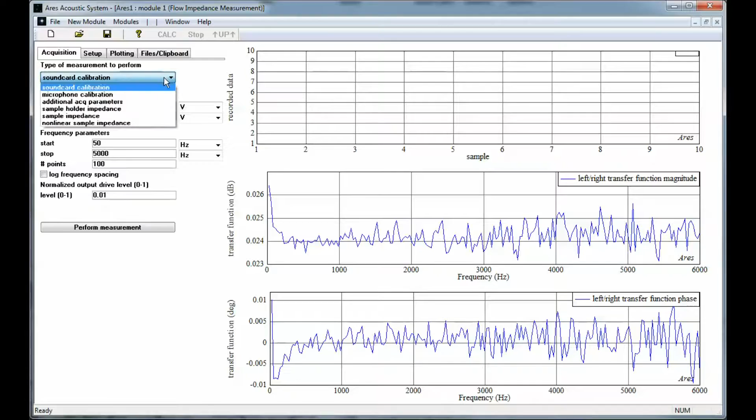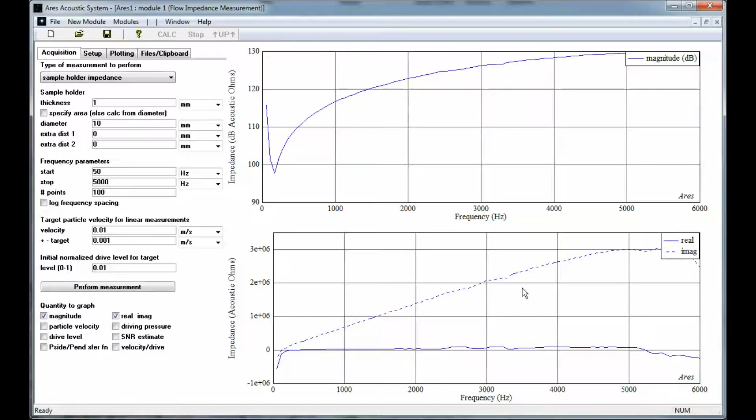Some additional parameters. Here's the sample holder impedance that was measured. This is what's going to get subtracted from the actual measurement. And then the actual measurement is done under sample impedance. I've already got the sample diameter set to 10 millimeters. The sample thickness is only important if you want to normalize by thickness. We're not going to do that, so I'm just going to leave it as 1, an arbitrary number.

This parameter allows you to set the particle velocity through the material that's tried to be achieved during the measurement. By keeping this relatively low, substantially under about 1 meter per second, you ensure that you're measuring linear parameters and not getting any nonlinearities involved in the measurement. And we're going to go ahead and subtract the original sample holder. So I'm just going to leave this as the default name of dataset 1 and start the measurement.

It asks you to configure the system with the following stack up. We've already done this. So I'm going to hit OK, and this is going to take a few minutes to run, so I'll probably just skip through this in the video that gets posted.

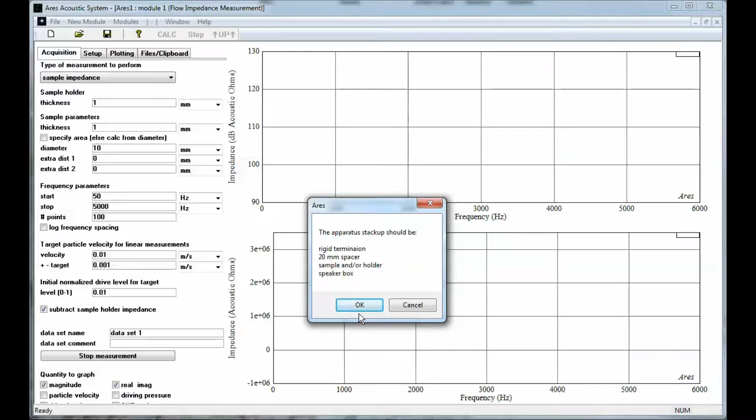Okay, so it's done the low frequency measurements with the large stack up. Now it's asking us to switch it to just the 20 millimeter spacer. So I'm going to go ahead and change the stack up to just use the 20 millimeter spacer. We'll do the high frequencies. I'll go ahead and hit OK.

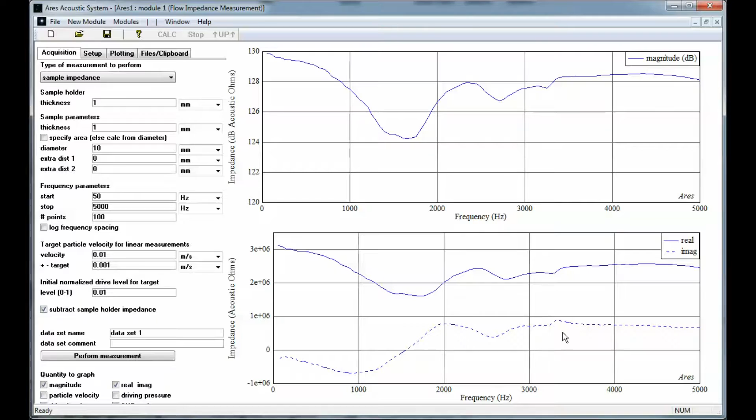Okay, so the measurement is done. I'll hit OK here. So looking at the impedance, we see that there's some frequency dependence to the impedance. We'll discuss what this means in a little bit here.

So I'm going to go to the plotting section. I'm going to plot that data set that we just took. And I'm going to also go ahead and plot the sample holder impedance. I'm going to increase the line thicknesses here so we can see it a little better. So the impedance that we measured is in blue. The green impedance is the impedance of the sample holder itself.

So the sample holder has very little real part to it. The imaginary part is dashed. The sample holder impedance has quite a bit of mass reactance to it. This is roughly j omega going up. Had we included this impedance with the actual measurement, this imaginary impedance would be way up here, and it would mostly be consisting of the mass reactance of the sample holder and not representative of the material itself. So it is important to subtract the sample holder impedance in most cases.

So here's just the sample impedance. A few things to point out here is that it's non-uniform over frequency. If the material was held stationary, completely still, it is a porous material, so air can flow through it, and you'd experience the resistance of the air flowing through the material. If the material was purely stationary, we'd see that the real part was largely a constant value, independent of frequency, and the imaginary part would have a very little bit of mass reactance of the air inside the pores of the material.

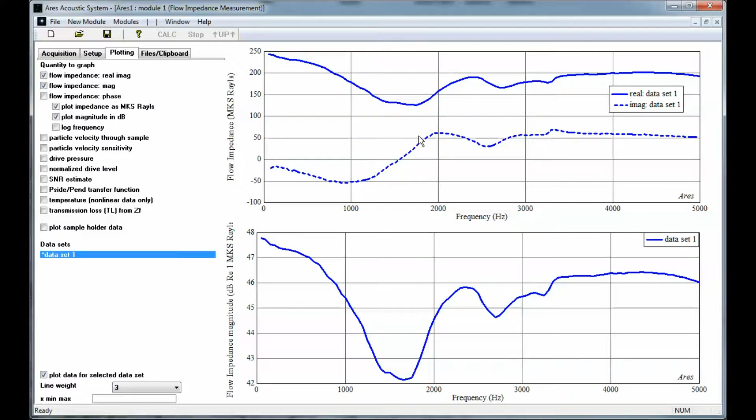So that's how this material is behaving. If you use this material in an acoustic application, it's worth understanding how its impedance behaves so that you can understand your design better. Now, one way to use this is to import this impedance directly into an Ares model. So I'm going to go to Files/Clipboard.

There's only one data set here. I'm going to select Save the Sample Impedance. Hit Save. I'm going to overwrite my existing data set that I made. And now I'm going to open up an Ares model that I have previously built that shows a speaker radiating into free space, and we're measuring the pressure at about a foot away.

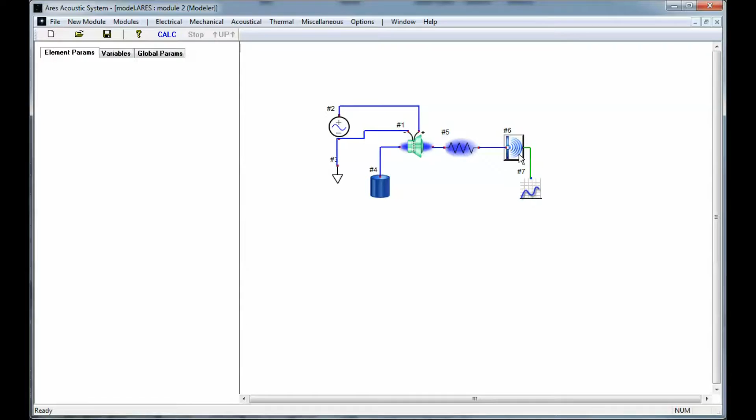Here in the model, I've got this resistance element put in here. We're going to use that momentarily, but for now I have the resistance set to 0, so this isn't doing anything to us. And the graph response is just showing a classic baffled speaker response.

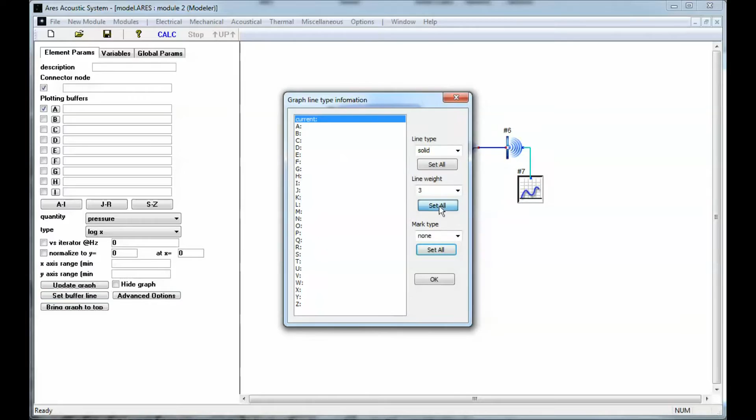Now I'm going to copy this into buffer A of this graph element and plot it. I think I need to set the line weight to be a little thicker. So now I've got buffer A equal to the current buffer, so they're just lying right on top of each other. If I come in here and I use this feature to load the impedance of this impedance file that we exported, this option becomes available to use the file impedance data.

I'm going to check that. I'm going to recalculate, and so now we're seeing the effects. The blue curve is the effect of having the material in place. Its main effect is to drop the response at resonance, so we're adding some damping, bringing that down.

We don't see a lot of effect due to the complex frequency response of the material, but you can see we're getting a little bit of an effect in here. So all of those impedance variations of the material are causing just a few dB ripple in the response. Probably not important for most applications. But the main thing it's adding is this resistance that's dropping the response at resonance.

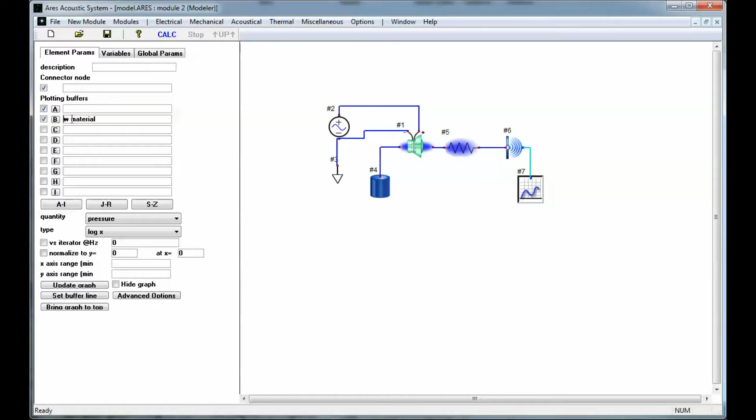So I'm going to go ahead and copy this into buffer B. I'll plot it and I'll call this with material. And now I just want to see, for the heck of it, what would happen if I didn't use the impedance of the material, but I just used a simple resistor. How well does a simple resistor model the behavior of the material?

In acoustic terms, in acoustic ohms, 1 mega ohm is about a little bit of resistance to add. So I'm going to add 1 mega ohm to this model, hit calculate, go back to my graph. So with material is red, no material green, and our 1 mega ohm is in blue. So it definitely had an impact. It decreased the response at resonance, but it needs to come down a little bit more.

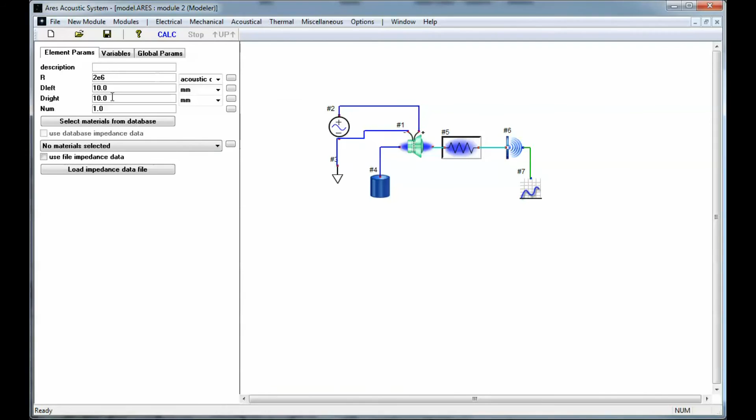I'm going to go ahead and change this to 1.5. I did this previously. I think that worked the best. So I'm going to hit recalculate. And 1.5 is close. Looks like we got to come up a little bit more. I'm going to try 1.8. Close again. I guess I'll go to a full 2 mega ohms. Let's go to, I suppose, 2.3.

I'll just quit there. So we're getting a fairly good match with 2.3 mega ohms to bring the resonant passband down. But if we zoom in here, it's not fully capturing the motional behavior of the material, but it's pretty darn close.

So again, these tools are meant to help you understand how the material behaves, to be able to measure its acoustical impedance, see how much of the material motion is affecting it, measure the DC resistance of the material, and then by using it in conjunction with the modeler, you're able to see what kind of impact you can expect that impedance to have on your overall system response. So I hope you found this useful.